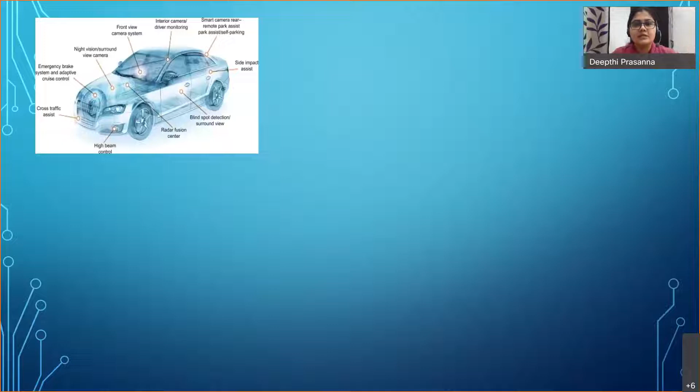And then we have applications in healthcare, hospitals. There are a lot of life-saving equipments which are electronic devices. And then communications, I cannot tell you how important this is. Communication is present everywhere, right from satellites, telecasting, broadcasting, networking, your internet, your Wi-Fi, in defense - communications finds a lot of applications wherein electronics is giving a lot of emphasis.

And entertainment industry, music or filmmaking or TV, documentaries, anything related to the entertainment industry is heavily relying on electronics these days because it's slowly going digital. And robotics, of course we have a lot of applications in robotics. And then education, classrooms are becoming smart these days. There are smart classrooms, and of course online classes, which have become very prominent these days because of COVID.

Because we have the right set of electronic gadgets and the relevant things with us, we are able to have a seamless experience of sitting in a classroom and listening to the teacher, even from the comfort and safety of our homes, which is a very big thing. Thanks to electronics for that. And then agriculture as well, slowly the farmers are moving into smart practices to improve their yield. So all in all, electronics is a very fun, innovative, creative, challenging field, which is helping us, which is making our lives more easier actually.

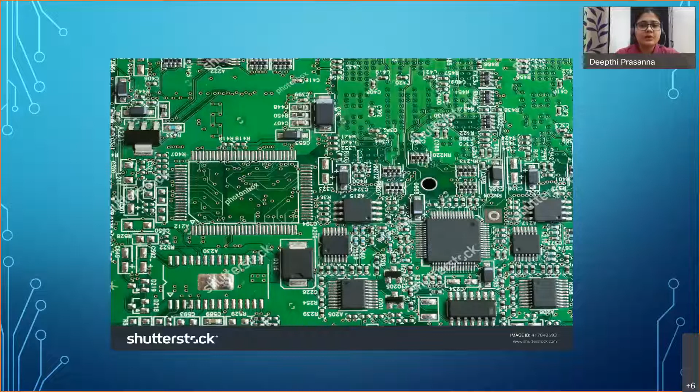Okay, before we jump in, let's brush up a little on the basics. What are semiconductors? Semiconductors are materials which have a conductivity between that of a conductor and an insulator. So how does it work? At room temperature they don't conduct, they behave like an insulator. You supply it with some energy, the valence electrons in the outermost orbit break from the orbit and start conducting, and it behaves like a conductor.

So essentially it's mimicking the operation of a switch. You turn it on, it conducts; you turn it off, it doesn't conduct. So the behavior of a semiconductor as a switch is extremely important in electronics, because we need that controllability on our devices. We don't want things to always keep conducting, or to not conduct at all. So we need that controllability which only semiconductors can provide.

The commonly used semiconductor is actually silicon, which is abundantly available everywhere as silicon dioxide, or in plain words, sand. Silicon is extracted out of sand. There are other options in semiconductors as well, like germanium or gallium arsenide, but these are not very commonly used. Most of the components that we see are made out of silicon only, but we have other options as well.

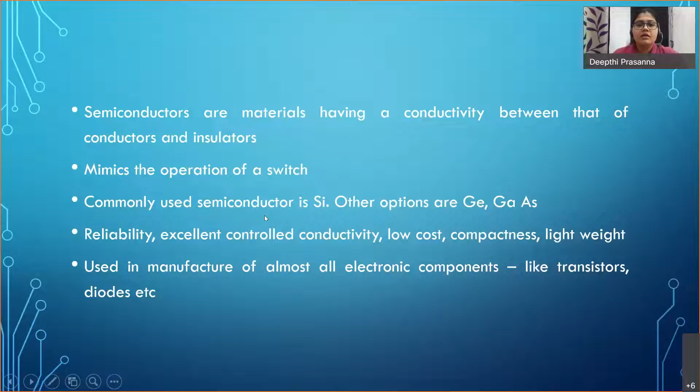So what happens when we put multiple transistors on one single unit? An assembly of these components like transistors, fabricated as a single unit, are called ICs, integrated circuits—the little black boxes that we saw earlier. VLSI stands for Very Large Scale Integration. Now what do we integrate here? It is the same transistors which we saw. The transistors are integrated on a very large scale on one single component. That's why it's called Very Large Scale Integration.

The design, development, and manufacturing of these integrated circuits or ICs is nothing but VLSI. So who works on VLSI? Let's see who are working on VLSI.

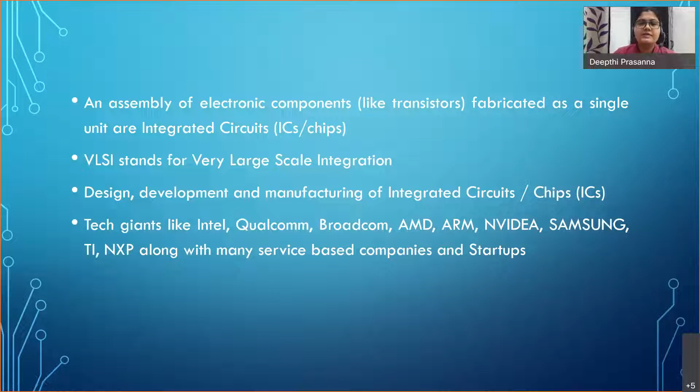So we learned what ICs are. Now let's see how they are classified. The ICs are broadly classified into three categories. There are ASICs, which are application-specific integrated circuits.

These are ICs manufactured for a particular requirement, for a particular specification. They are completely optimized and customized to suit only one particular requirement. For example, you might find some talking toys in the market. They'll have only one small IC which does only that talking part. So they are specific to one particular application. Those are ASICs, and they can support digital, analog, mixed signal designs.

Mixed signal designs are a combination of both digital and analog. For example, I don't know if you've come across ADCs and DACs, that's analog to digital and digital to analog converters. Those are ASICs, and these are non-reprogrammable. Once you program it as something, you cannot change it.

These are ASICs. Then we have general purpose processors or microprocessors. These are the normal CPUs which we find in all computers. They are not optimized for any particular requirement, they can perform any operation, and they're not customized like I said. Everything else is same as ASIC, but it's just not optimized for one particular requirement. It can perform any operation.

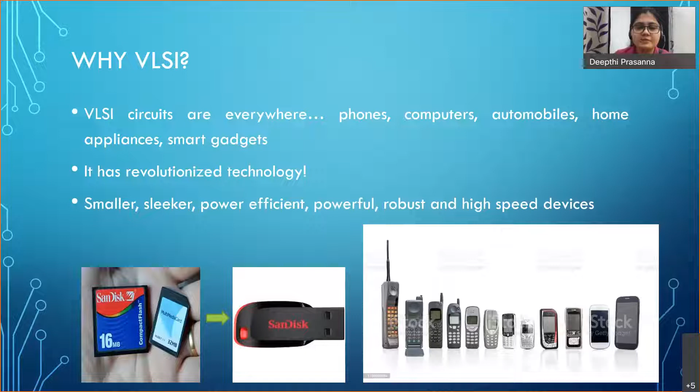The reason is battery technology has not evolved as much as VLSI over the last few years. What do we need in our phones? We need a phone which has a good battery, more mAh. We need a good camera. Even if it has a bigger battery, we still want it to be sleek, lightweighted. It shouldn't feel like holding a brick in your hand. And we still want to do everything, play games, chat, call, but still we want a smaller phone.

So how is this possible? Because the space available for an IC is reducing, but we still want more and more computational capabilities out of it. So how this is possible right now is we are taking multiple ASICs, the small ASICs I talked about earlier, and putting all of them into one chip. So instead of having a house, we are now building a locality on one chip.

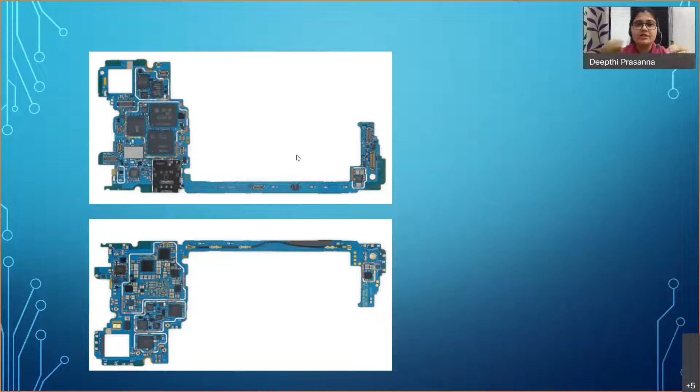What does a locality have? It will have houses, a playground, school, college, hospital, everything. So we are putting multiple things on one chip, and that is called a system on chip, or SoC. Because of SoC, we are able to fit more and more things on one single chip so that we can save a lot of space.

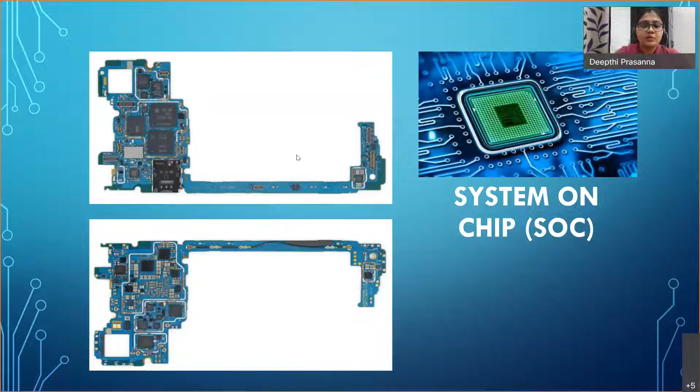And when I say we are putting more things, you would naturally feel this might increase the area of the chip, because we're putting in more things. So a chip which was probably this big would now have scaled into something this big because we're putting more and more things. But no, we have a complete system put on a chip which is as small as your fingernail.

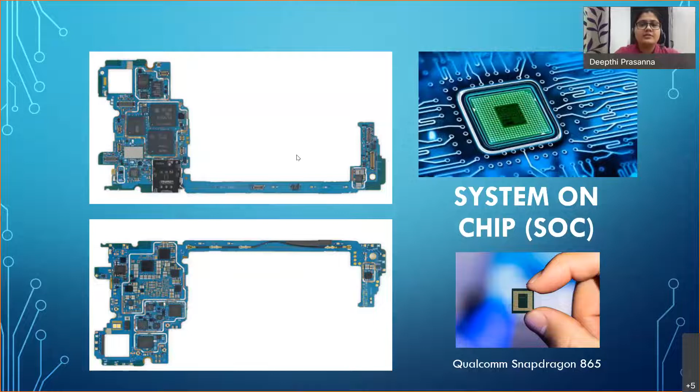Is my video seen? Okay, I'm assuming it's visible.

The number of transistors per chip started with some hundreds, went on to a few hundreds, then became thousands, and from thousands it became lakhs. Now we have almost millions of transistors on one single chip. That's because we are scaling the size of the transistors as well as putting more and more onto a chip. Right now we have almost 5 nanometer sized transistors, very close to the size of an atom. It's that small, and we have millions of such transistors on a complex network sitting on one small chip, as small as your fingernail.

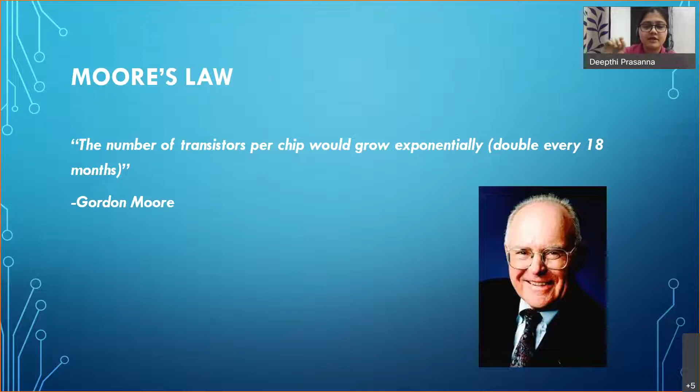So that was a small introduction on what this industry is all about. Now let me take you through the life cycle of a chip. What happens there? Firstly, someone, usually a customer, comes up with the specification, a set of requirements.

Let's take a small example here. I'm sure you might have studied about adders, half adder, full adder, and all. Let's take a full adder as an example. Suppose the customer comes and says, look, I want something which will take in two numbers, add it, and take the previous carry also, and give me a sum output and a carry output. So this is the specification a customer provides.

Once we get the specification, there will be someone called a system architect. An architect will sit down with other engineers like circuit design engineers and logic engineers.

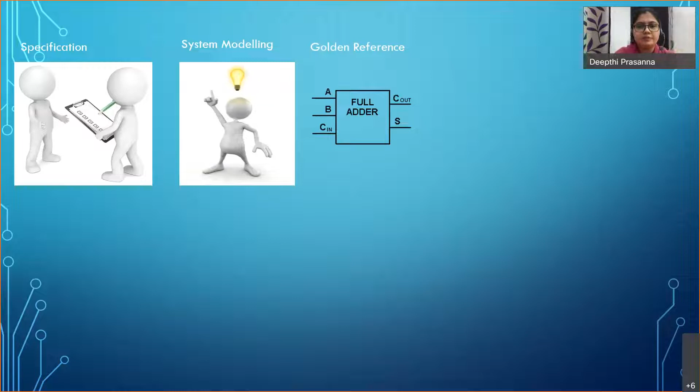So they sit together and bring out a system model as to how we should design this component to meet the customer's specifications. With that modeling, we get something called a golden reference. Like I said, this is a full adder, which takes two inputs and one carry input, and gives you the sum and carry out. That's simple. Once we have the golden reference in place, the architect and other engineers will come up with the architecture definition.

Now we want to implement a full adder, but how do we realize it? What we can do is take two half adders and connect them serially, connect the carry of both of them, OR them together, and give it as carry out. So this will be our architecture.

Now, once the architecture is in place, then comes the design. So there are design engineers. I myself am a design engineer. What we do is implement the design as per the architectural specification.

Now, because we are implementing hardware here, there are special languages which we use, called hardware description languages. Previously all the chips used to be done on VHDL. Currently, majority of chips are done using Verilog and System Verilog. Those are the hardware description languages. You will get to learn these things in your engineering. So using hardware description languages, we will design the hardware.

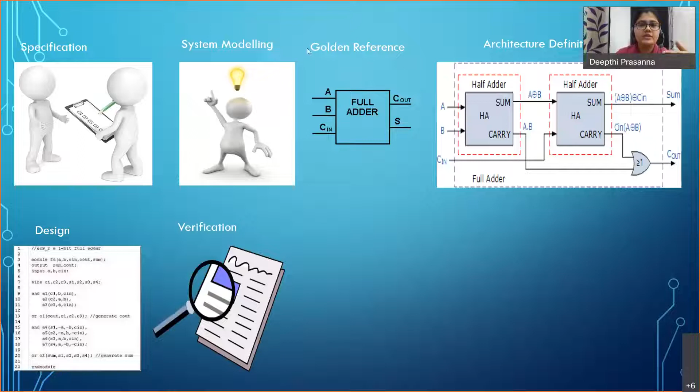Post this, it goes through verification at multiple levels because we want to check the intent—if the intent of the specification is met in the design. So at various levels, we perform verification.

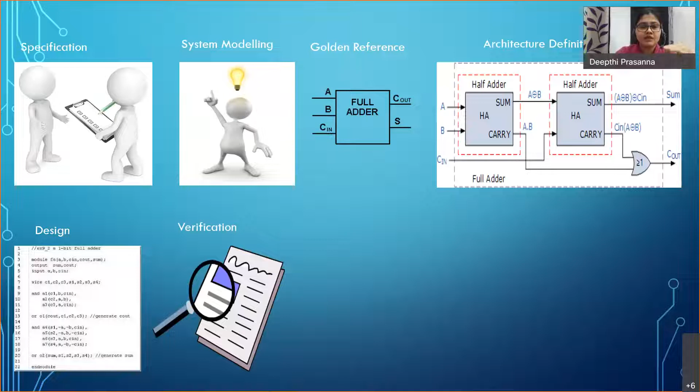And once verification is done, we have to convert it into a schematic. What is this? The design I spoke about earlier, where we code it using a special language—those languages are still English-like, which looks very similar to C language. But that's still an English-like language. It has not converted into hardware. We are actually building hardware.

So there is a process which converts this English-like language code into actual hardware gates, logic gates. If you see here, there are XOR gates, AND gates, and OR gates. That conversion is called synthesis. Post synthesis, the output we get is called a netlist. So the post synthesis netlist is actually taken, and that will be our blueprint in manufacturing the chip.

Now, once we have the schematic ready, we will be sending it to manufacturing in a fab. Fab is nothing but a fabrication unit, the place where the chips actually get manufactured. Like I said, the whole design starts with a speck of sand, from which we extract the silicon. There's actually a very nice video which shows you how the speck of sand is used in bringing out one full chip. Let me share that video here.

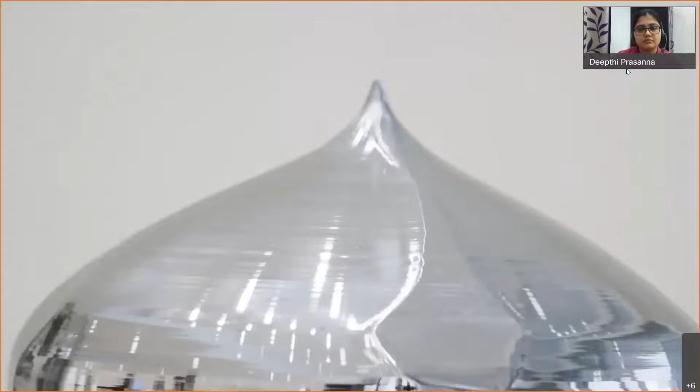Humble sand. This is what the building blocks of the future are made of. But making them is a long process comprising a great many steps. First, the silicon dioxide in the sand has to be converted into pure silicon. After that, it is cut into wafer-thin discs. In Dresden, these raw wafers are 300 millimeters in diameter and less than a millimeter thick. In our clean room, up to 35,000 chips are then made from each of these discs.

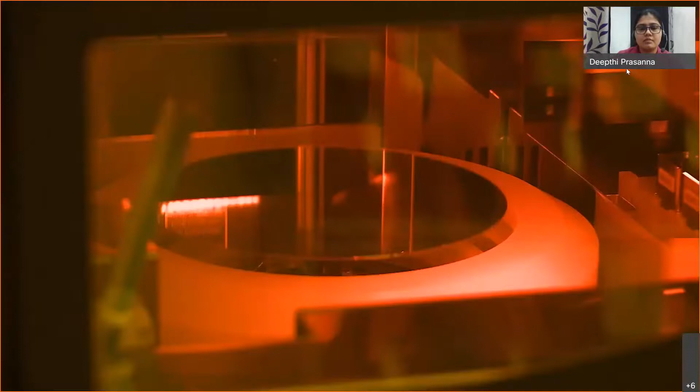In numerous process stages, the wafers are given their characteristic surface structure. After coating with a photoresist layer, the wafer surface is exposed, developed, and etched. This results in the desired conductor structure. Such structures are hundreds of times finer than a human hair. Dopants are then implanted in the material to increase the electrical conductivity of parts of the semiconductor. In subsequent phases, this and other process steps are repeated until the entire layout of the chip has been deposited on the wafer. This involves heating the wafer to more than 1100 degrees Celsius.

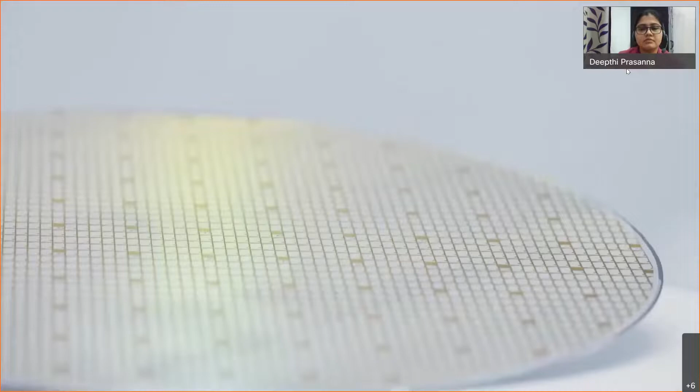In some cases, up to 27 times. Up to 200 measurements are done, and up to 26 exposures. All in all, this can mean as many as 700 processing steps and 14 weeks of processing time. Once this is completed, the microchip is assembled from as many as 30 such layers, like a mini skyscraper. Each layer has its own function. Interconnecting them makes the microchip highly complex. Semiconductor chips—the building blocks of our future.

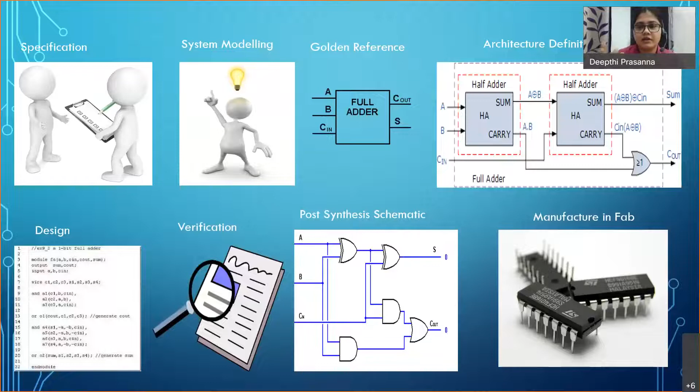So that was how you can get an entire chip made out of a speck of sand, which is actually quite fascinating. Let's see the entire design flow, what all happens. What I told you just now is actually a brief overview. Let's go into some details as to what actually happens.

The entire design flow is split up into two components: front end and back end. In front end, the customer or client will come up with a set of ideas and requirements, which we call specifications. From that, we extract a golden reference through modeling, and we do a microarchitecture definition. The architecture is defined.

Then we go into the design phase where we actually design it using hardware description languages. Then it goes into functional simulation to verify the functionality if the intent has been met. Then it goes through synthesis, wherein it gets converted from English-like language to actual logical gates.

Then there is something called DFT, scan insertion. DFT is nothing but design for testability. What happens here is post manufacturing the chip, when it comes out, we have to still test it out to see if the functionality is still working.

The reason behind this is we are dealing with transistors as small as 5 nanometers, so even a speck of dust in the air, which is not even visible to the human eye, if it falls on the chip, it can ruin the whole chip. Because of that, we need to be extremely careful.

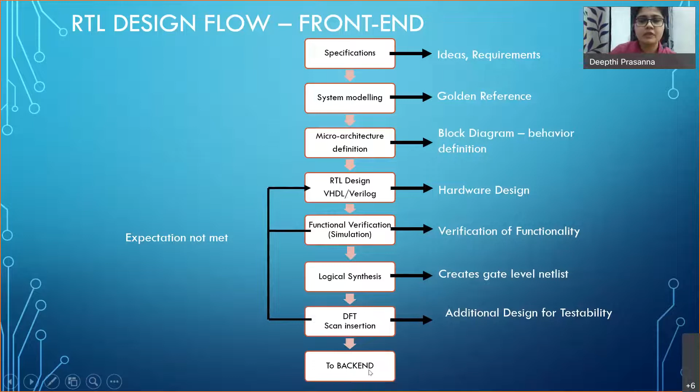Once all of this is done, it moves to the process called backend. In backend, we get the synthesized netlist from the front end, and then something called timing analysis is done. This is a slightly complex procedure, but just assume that timing analysis is making sure that all the data is reaching all the places at the right time. That's the major intent behind timing analysis.

After this also, there are more verifications done, at multiple levels, like I said. Again, if the expectation is not met, it goes back to the designer.

Once this is done, there is a procedure called floor planning. Imagine you're building a house again - there is an architect who will first make a blueprint as to what goes where: the kitchen goes here, the living room goes here, the bedrooms are over there. Like that, we also make a floor plan as to which component goes where.

The floor planning is done first, and then post that, we place the actual components as per the floor plan and we route them. Route is nothing but connecting each transistor to power and giving it a ground.

We need something to power the transistors, because that's how semiconductors work - we need to power them up. So we have to supply power rails and also give ground to each and every single transistor on the chip. That process is called routing. Then there's parasitic extraction.

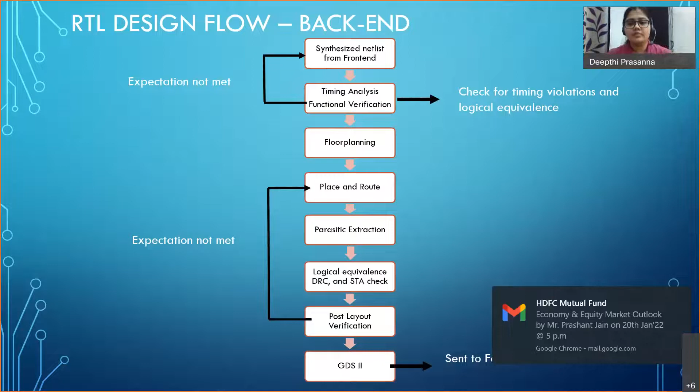So those masks which the video was talking about are nothing but the GDS2 formats. So we will finally hand over the masks to the fabrication units, and the fabrication units will then take those masks and follow all the procedure listed in that video. And finally, we'll be getting our chip.

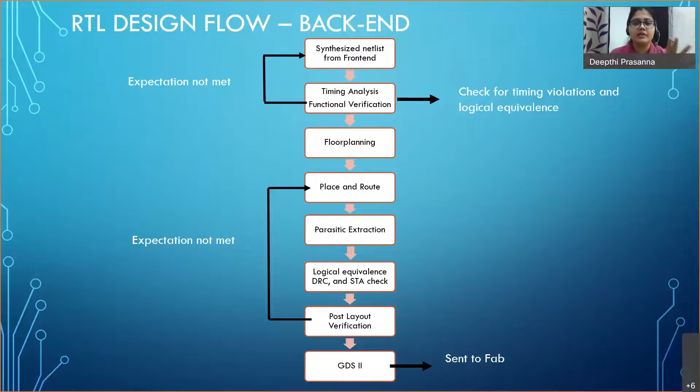There's actually one more video which was shared by Intel, publicly shared by Intel, which gives you a complete overview of whatever I told so far. It's called the life cycle of a chip. So let's take a look at that.

Hi, I'm Chip. I'm a computer chip. I'm also called a microprocessor, but you can think of me simply as the brain that controls your computer. I'm probably the most complex product manufactured in the world, but I'm not much bigger than your fingernail. I'm packed with billions of microscopic switches called transistors that make me work.

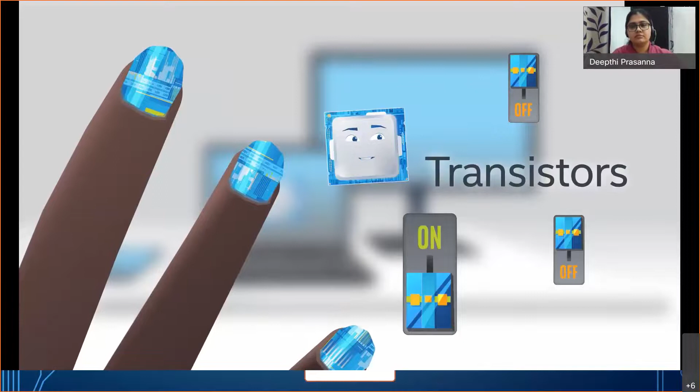Come along with me. I'll show you my journey inside Intel, from when I'm first created to when I'm shipped to customers. Before I become the beautiful, complex square that you see, I begin as an idea in the minds of chip architects. These amazing engineers work with logic and circuit designers to create computerized drawings, which eventually become the blueprints for my transistors and layers that make up my complex circuitry.

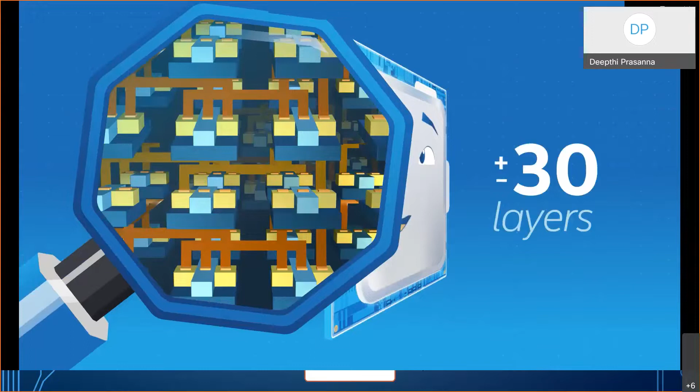You see, I might look extremely thin, but I'm made up of about 30 layers that resemble a multi-level highway. Some of the layers form my transistors. Other layers make up the interconnects that tie my transistors together in a very specific configuration. My transistors can switch on and off up to 5 billion times per second, so your computer can complete tasks. But more on that in a bit.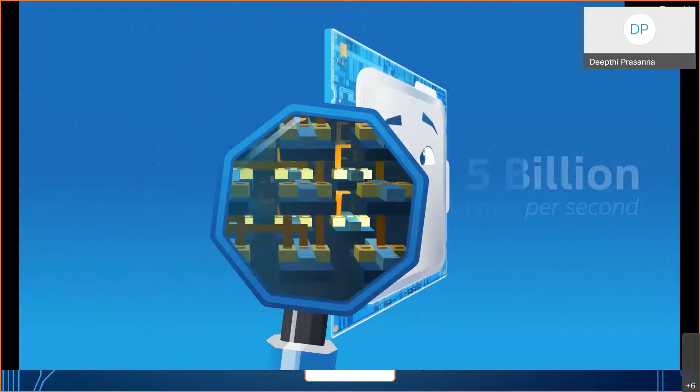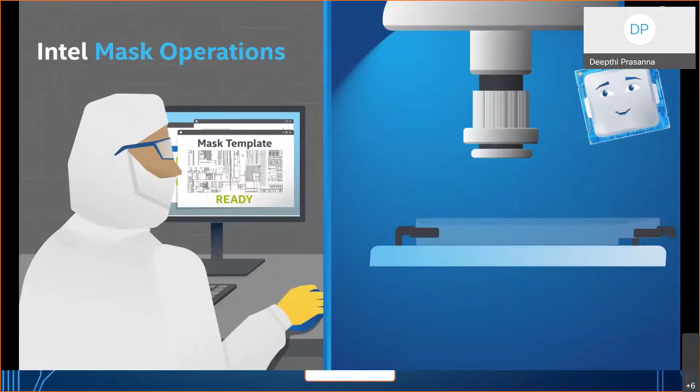First, once the chip architects are happy with my design, they send their blueprints to mask engineers. Mask engineers take those digital blueprints and use an electron beam machine to convert the computer-aided design drawings into a template usable in manufacturing. The machine's electron beam takes that data and replicates the circuitry pattern onto 6 by 6 inch pieces of quartz, just a quarter inch thick. These quartz pieces, which we call masks, are stencil-like templates that we use later to build up the circuitry onto a silicon wafer. It can take more than 50 masks to make all my layers.

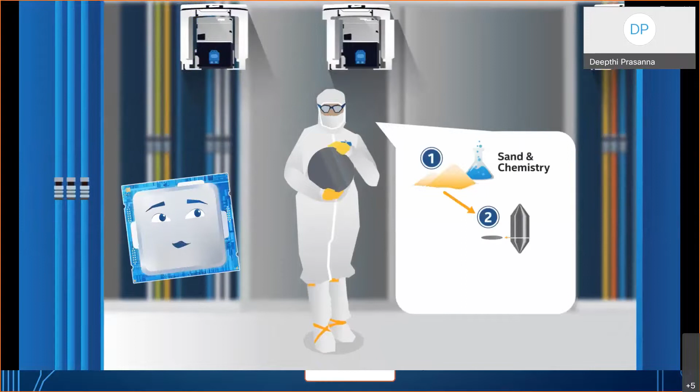As the mask engineers finish each mask, they send them to fabrication factories, or fabs, to begin manufacturing me. These huge factories are where you'll spot manufacturing technicians in those funny-looking bunny suits. And those curious pizza-sized discs are silicon wafers, made from the silicon extracted from sand. Techs take the masks and use photolithography machines to shine light through them, then through a lens to reduce the image, and then onto the surface of a wafer.

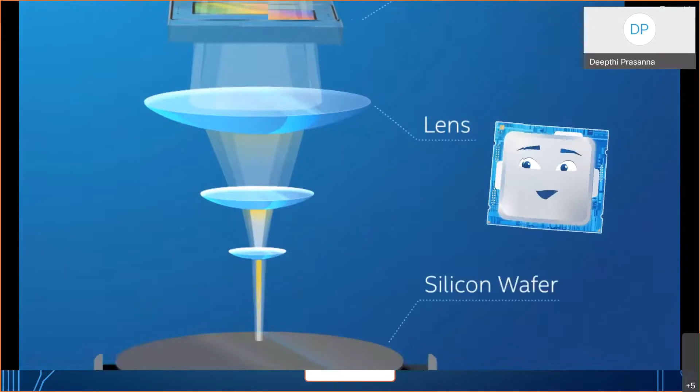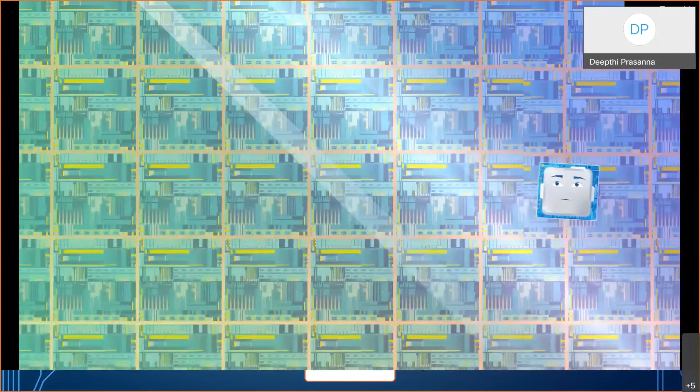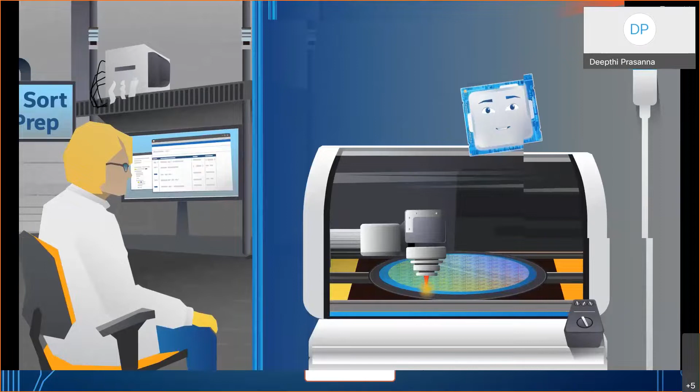They do this repeatedly, using different masks for all my different layers of transistors and wire connections. Eventually, the wafer will be imprinted with hundreds or even thousands of tiny individual chips, like me. From here, the fab sends the finished wafers to die sort prep facilities. In these facilities, diamond saws cut the wafers into thousands of fingernail-sized individual rectangles, each called a die, or computer chip. Die sort prep machines cherry-pick the working chips and then hand them off to yet another machine, which places them onto reels.

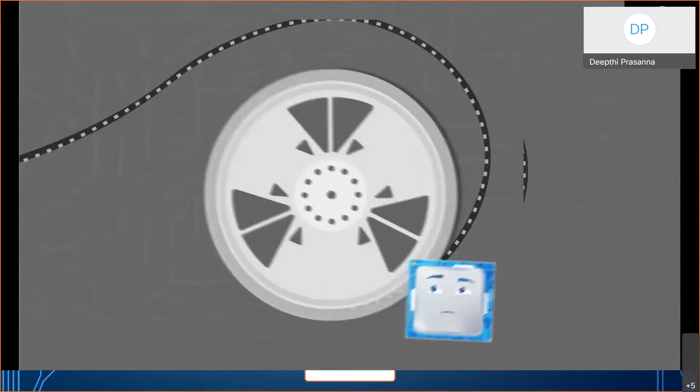These are then sent to our assembly and test plants. Here, technicians take each die and test them one last time to make sure they're healthy and good to go. If we pass, we're then mounted between a substrate and a heat spreader to form a sleek enclosed package. Our exterior package protects us from getting knocked around, heat, and contaminants. Once we go inside a computer, our package also forms electrical connections between us and the circuit board.

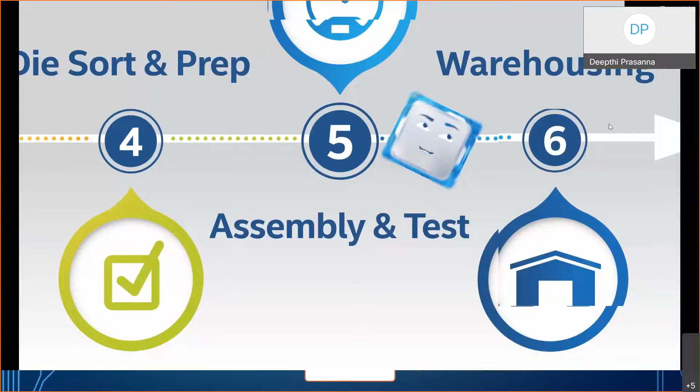We've got just one more step before we reach customers: the finished goods warehouses. All Intel assembly and test plants have them. From here, logistics professionals send us directly to some customers, such as system manufacturers, or they ship us to global distribution hubs. From these hubs, we might be sent out to original equipment manufacturers in trays, or get boxed up nice and pretty for retail.

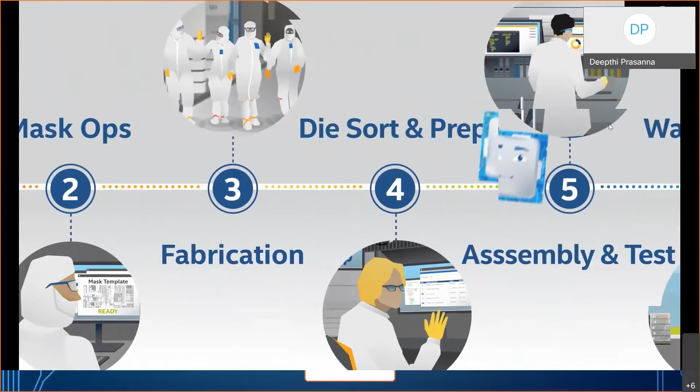Phew, what a journey, right? So many Intel people from around the globe working together to design, create, and deliver the tiny, amazing chips, like me. So every once in a while, give a thought to old Chip here and all of the steps it took me to get from concept to powering the computing devices you depend on every day.

All right, so that was Chip for you, which very nicely explained all the processes. Okay, moving on.

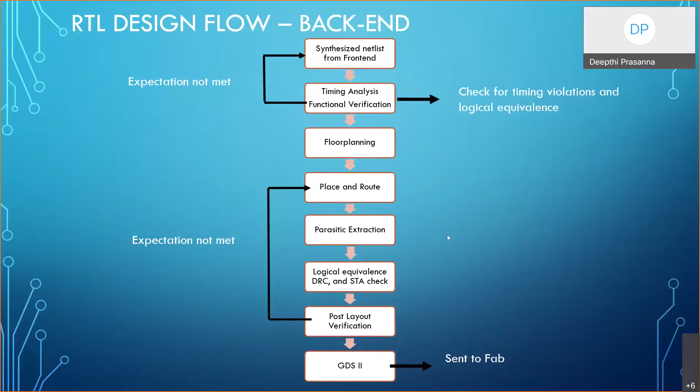All right, so lastly, let's look at the opportunities that you can find in the VLSI industry.